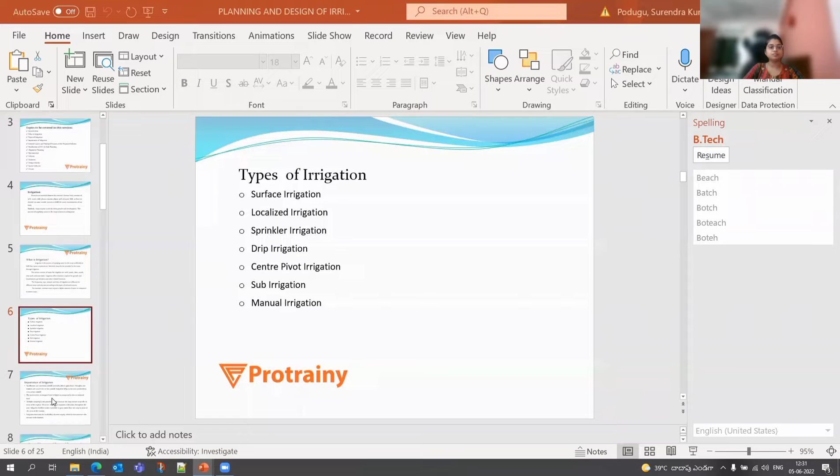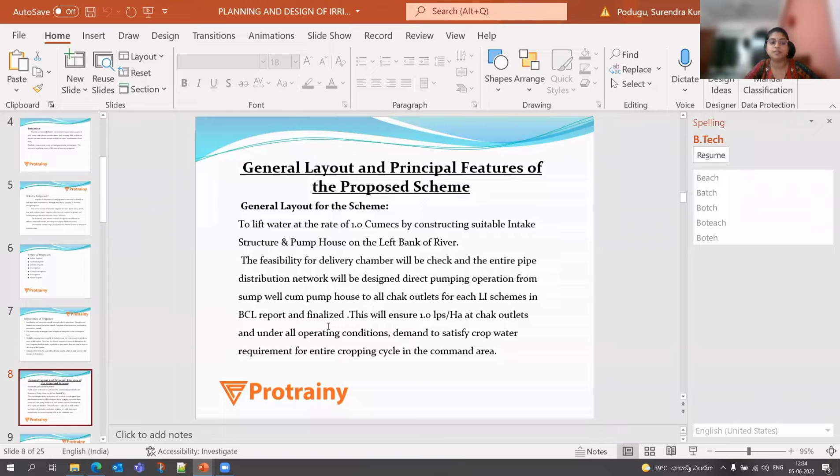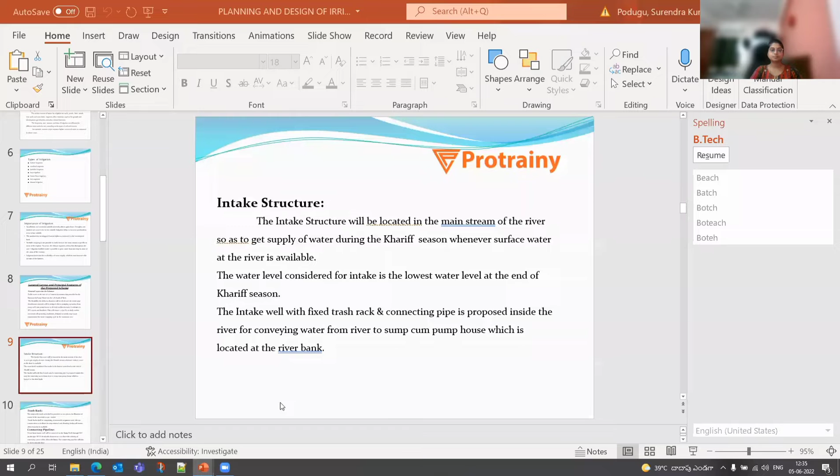Trash rack: the removable trash rack is provided at two places for filtration of coarse and fine material, as per the tender. That means from the river, the coarse or fine materials are filtered using this process.

Next, connecting pipeline: this is used for water distribution purposes. The length of the connecting pipe should be shown in the GAD, and an L-section should be provided, meaning the longitudinal section. This is used to know the ground level, top of pipe level, bottom level, and gradient line. This section should give a brief description for this purpose.

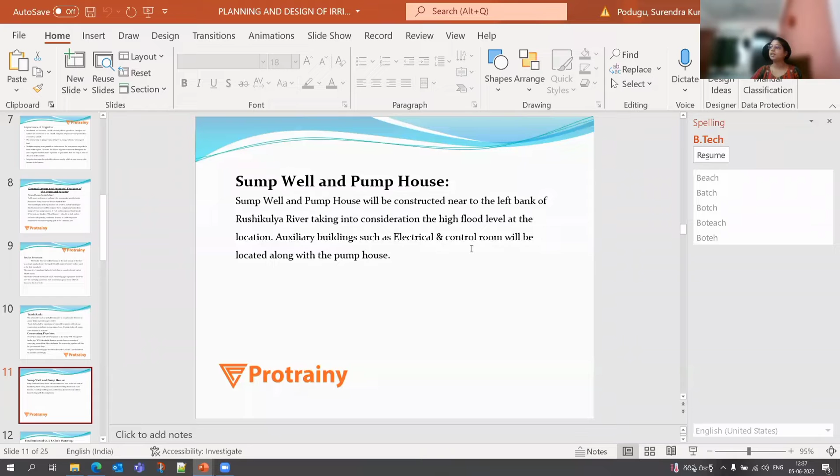Sump and pump house: where will we construct the sump house and pump house? The sump house and pump house will be constructed near the left bank of the river - for example, the Rushikulya River - taking into consideration the high flood level at the location. Wherever the high flood level is, the sump is to be constructed, along with the electrical, pump, and control room located with the pump house.

Next topic: finalization of the CCA, chak command area. These are the most important features for any irrigation planning and chak planning, and for water supply schemes as well. First of all, the detailed survey and collecting the revenue records from the department and site.

First, the culturable command area under the scheme was identified by deducting the uncultivated land. That means uncultivated land is government land, ponds, lakes, or unsurveyed areas. These are the uncultivated lands, including gochar lands and village settlements. Village settlements are where there are houses and no cultivated land, so that is also uncultivated land.

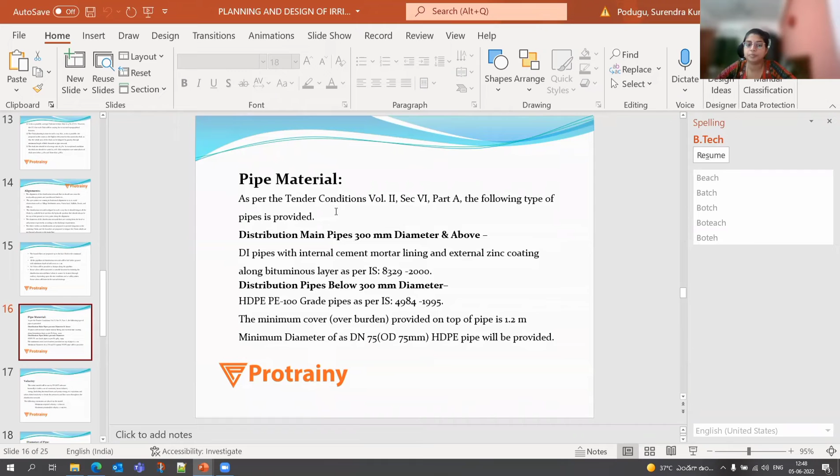HDPE is used. Okay, next content is the velocity. How much velocity do we use? What consideration? First of all, velocity, how to decide?

These depend on the EPANET software. EPANET uses internal continuity, mass balance, and energy equations. That means the software is used to account for frictional loss and pumping energy. These two equations solve the mass balance equation throughout the distribution.

Okay, in most cases the consideration for minimum velocity for the irrigation process is 0.6 meter per second. Maximum permissible velocity is 2 meters per second. These are the most useful features.

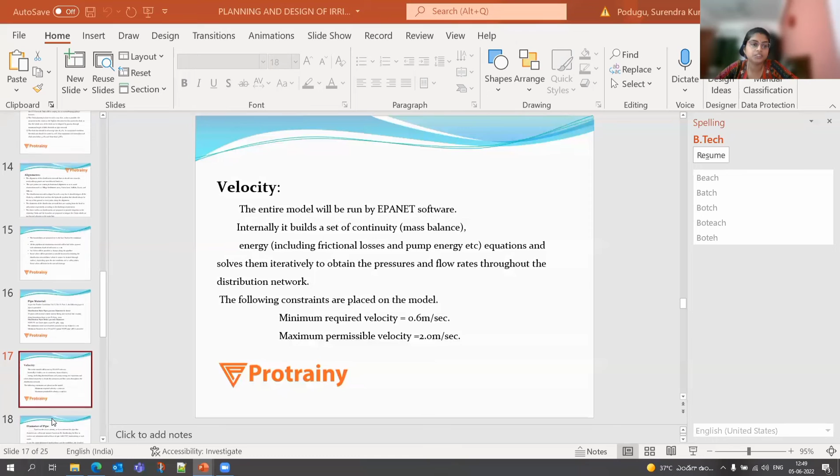Diameter. Next topic is the diameter. Based on the above criteria, we select the pipeline, meaning what we use is for MS or DI. We can choose. That means MS, where we provide MS.

Where the velocity will be up to 2 meters, we use MS, for 1.2 to 2. Okay, below 1.2, DI. From 0.8 to 1.2, HDPE.

Okay, minimum residual head depends on the project, 15 meters is the consideration. These features are given in the DPR. How much is considered there, we decide and provide the diameter of pipe.

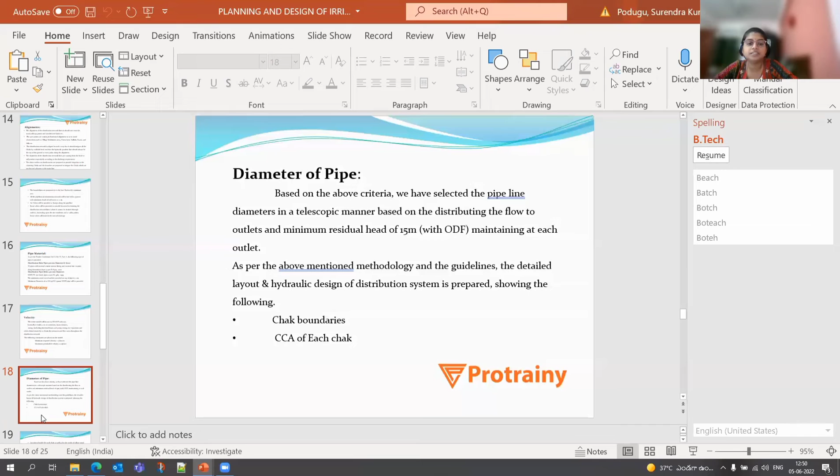As per the above mentioned methodology and guidelines, the detailed layout and hydraulic design system should be prepared showing chak boundaries and each CCA of each chak. CCA means deducting the uncultivated land from the cultivated land. There we will decide the ICA.

Next one, location of outlet. Location of outlet for each chak, where we provide the outlet, at the highest elevation of the element.

Alignments of the distribution network along with nomenclature should be given. There we decide, for example, LBC 1, sub-minor 1, sub-minor 2, sub-minor 3, like that, giving names depending on the project title.

Node numbers: again, we prepare the node numbers depending on and compared to the chak command map, and also in EPANET there will be the same node numbers. Pipelines between the nodes, discharge between the nodes, and diameter between the nodes. These are the most important features.

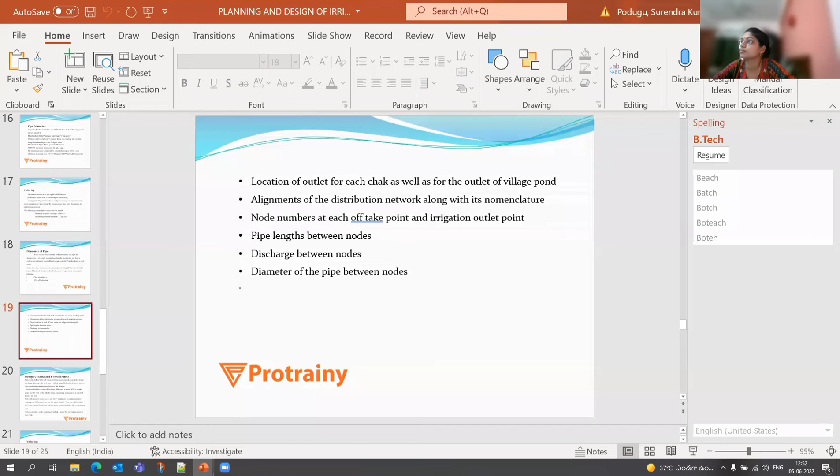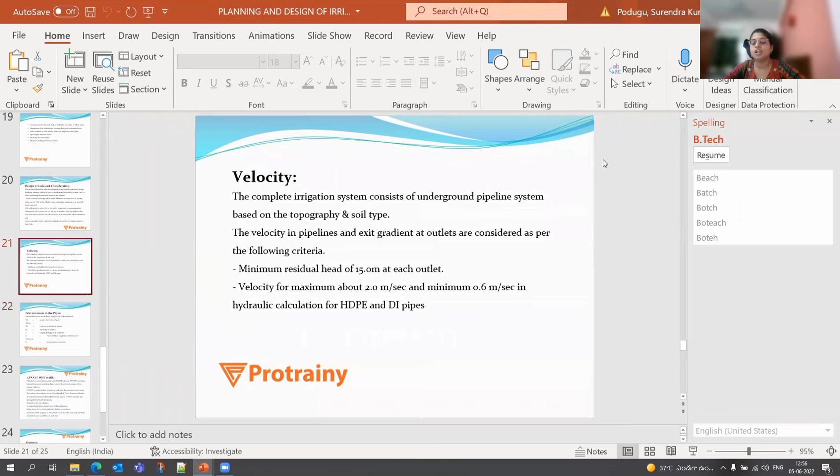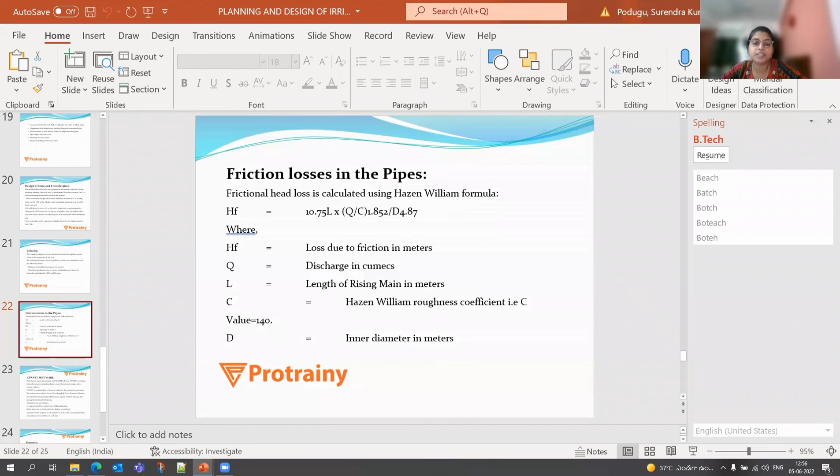Frictional losses in the pipe - how to calculate frictional losses? Using the Hazen-Williams formula, we calculate the head loss. HF equals 10.75 times L into Q by C power 1.852 by D power 4.87. HF means loss due to friction in meters. Q will be discharge in cumecs, meaning meter cube per second. L means length of the rising main in meters. C means the Hazen-Williams roughness coefficient, should always take 140 and 130 only for EPANET. D equals internal diameter in meters. Next we discuss about the EPANET software, where we use it and how to use it.

EPANET software is used for distribution and irrigation projects, mostly to decide the pressure and velocity, to design in an economical way.

EPANET software - first of all, from the drawing we convert the AutoCAD drawing to a DXF file. DXF converter is also available to take all pipelines and convert them into DXF. From DXF we draw the EPANET file, which should be available in .NET. In EPANET there is no limit for the sizes of pipes, depending on the velocity and pressure to decide the diameter. So there's no use for limiting the diameter to 75 or 63, not like that - it should be provided for every project depending on the velocity and pressure head.